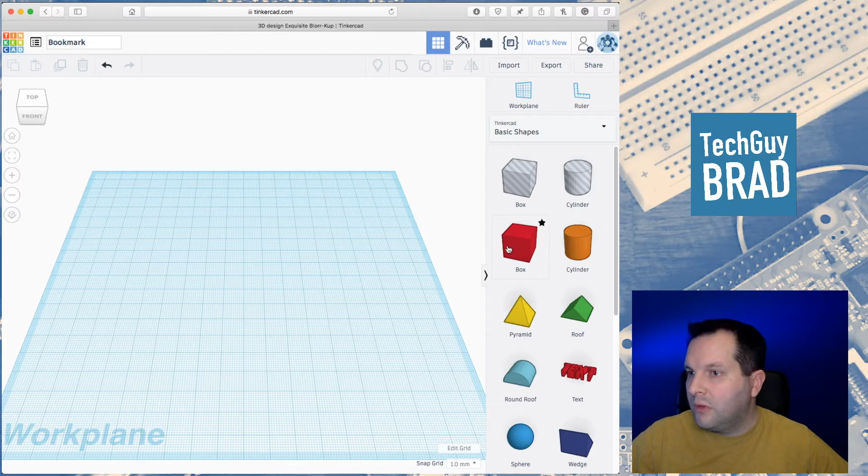On the right, you have a selection of shapes. We're going to start by putting a box on the work plane. On the sides of each of the objects you've dropped, you have opportunities to resize.

If you use your left mouse button, you can change your view. And if you use the scroll wheel, you can zoom in and out. You can also rotate objects by using the rotate indicators.

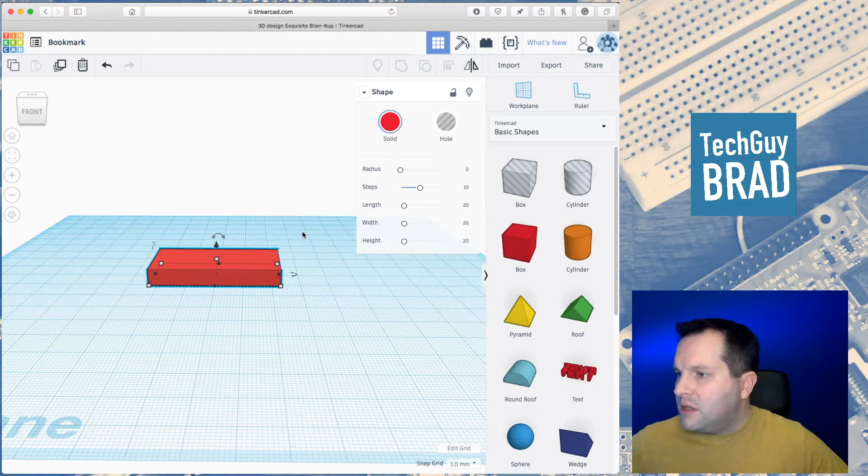You can also manually enter in your dimensions if you like. For our bookmark, we want it to be 100 millimeters by 25 millimeters by 2 millimeters thick.

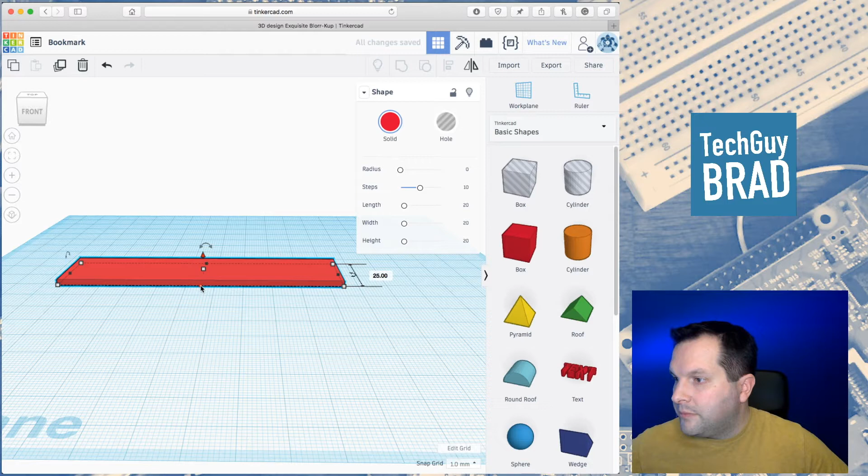Again, we'll just use these indicators to drag the dimensions out. So there. Our box is now 25 millimeters by 100 millimeters by 2 millimeters.

In order to complete our bookmark, we're going to need to use more shapes. These shapes can be built together like Legos, except these pieces can overlap. For instance, we have this box here.

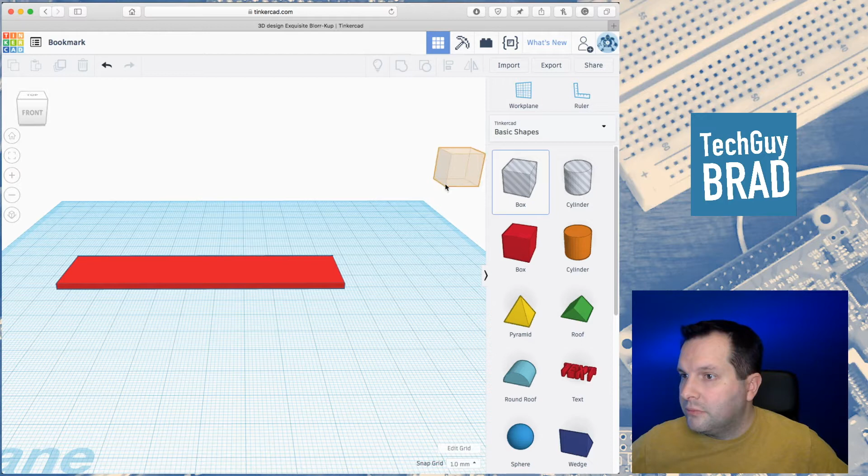This box represents empty space. When it's merged with a solid space, it will cut a hole into that space. Our bookmark is going to work a lot like a paperclip, so we need to create a hole in the middle of this space along with a finger that will be used to overlap over another page.

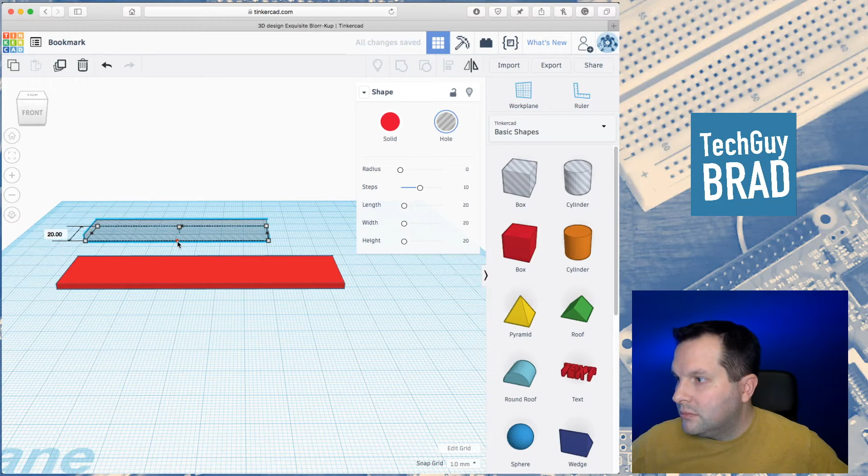To do that, we're going to resize this to fit inside of our other box. There.

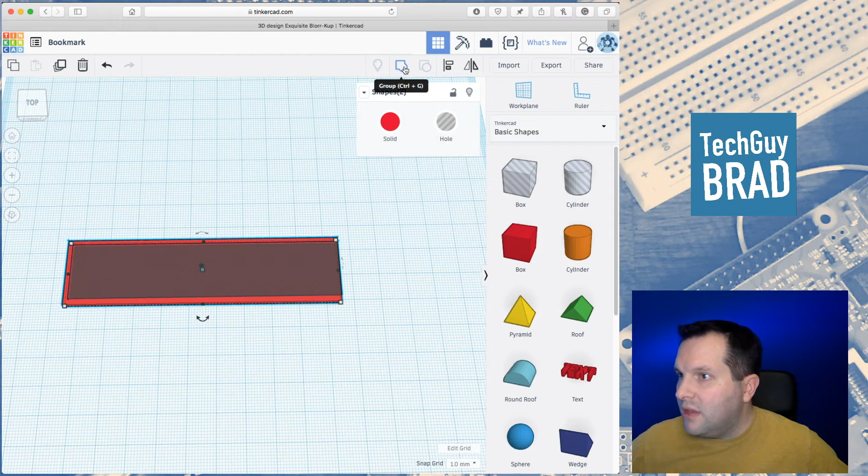Now the other thing that we can do is we can merge these two objects immediately. We do this by selecting both objects and then using the group tool. And now we're just left with one object, not two.

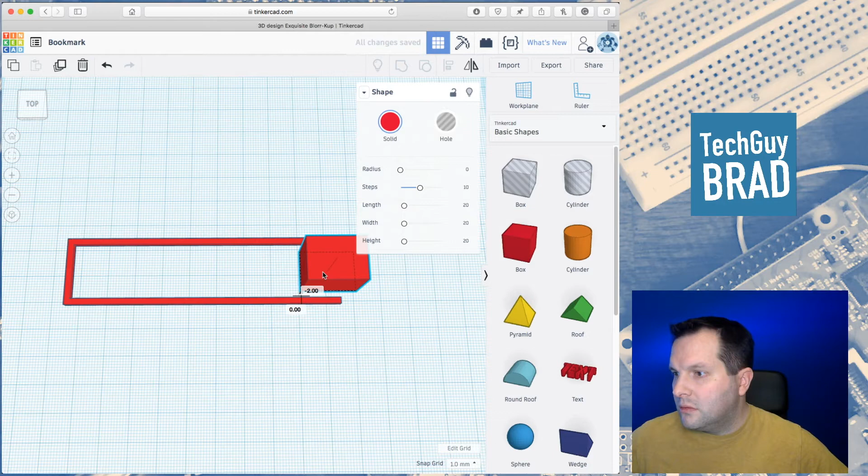Next, we're going to create the finger inside of the bookmark. We can do this by dropping the box, resizing it, just like that.

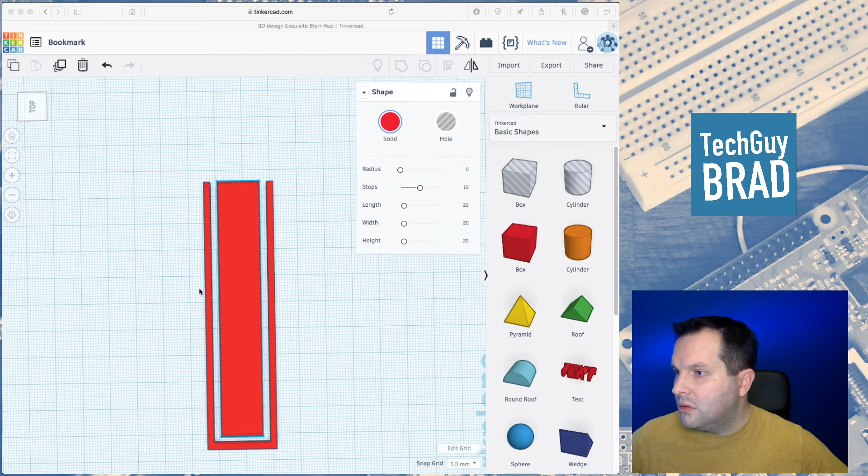Now that we have the bottom half of our bookmark that goes inside of the book, we want to create the top of our bookmark. So I'm just going to rotate my view and then drop the cylinder tool and create a nice round top to the bookmark.

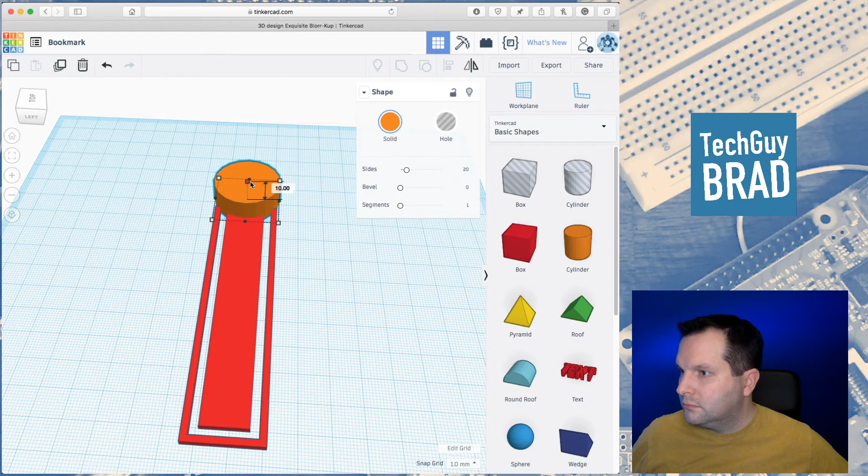Now to finish off our bookmark, I'm just going to put a letter B on the front of that. For that, I'm going to use the text tool.

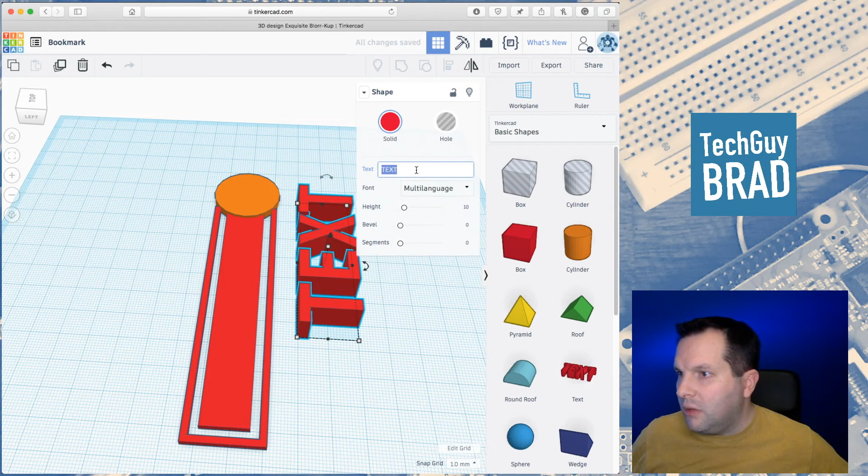And we can edit the text. We can use our rotate markers. Move our object over.

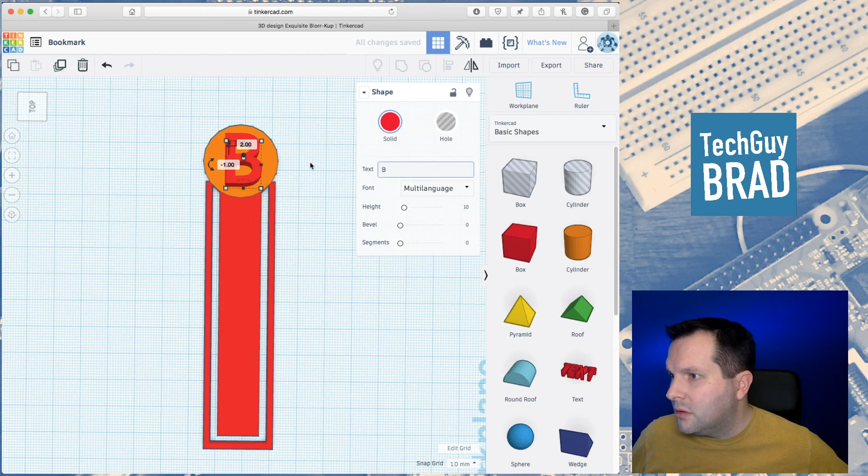And there, we now have a complete bookmark inside of Tinkercad.

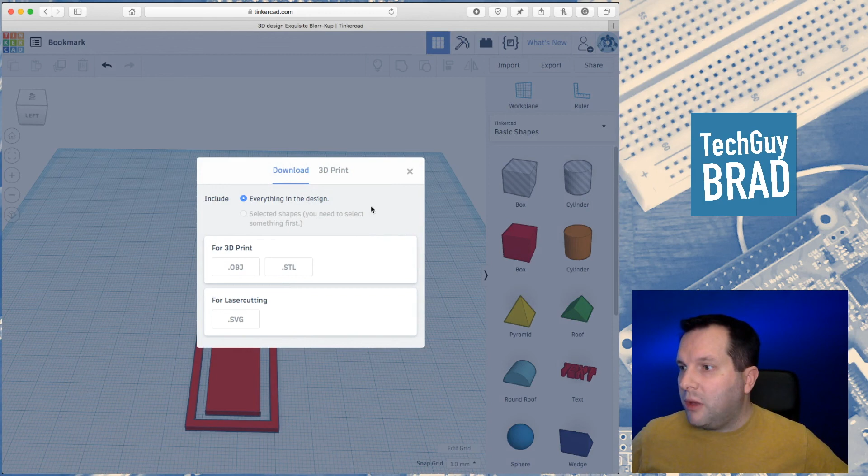Now that our bookmark is complete, we can send it to our 3D printer. To do that, we want to click the Export button, choose the STL format. The file will download to our computer, and then we can put it inside of our 3D printing software and print it on our 3D printer.